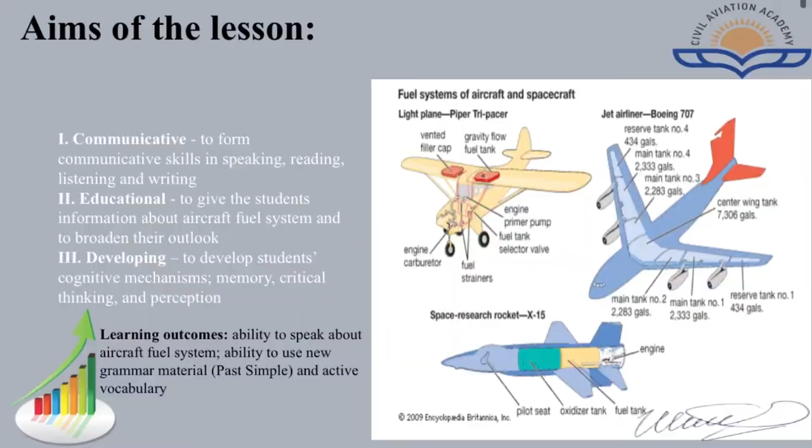While aircraft fuel systems are not regarded as one of the glamorous features of an aircraft's functionality, they are an essential feature of all aircraft. Their implementation and functional characteristics play a critical role in the design, certification and operational aspects of both military and commercial planes. In fact, the impact of fuel system design on an aircraft's operational capabilities encompasses a range of technologies that are much more significant than the non-specialist would at first realize, particularly when considering the complexities of large transport and high-speed military aircraft applications.

An aircraft fuel system may be defined as a system which enables the fuel to be loaded, stored, managed, and delivered to the propulsion system engines of the aircraft.

Fuel systems differ greatly from aircraft to aircraft due to the relative size and complexity of the aircraft in which they are installed. In its most basic form, the fuel system will consist of a single gravity feed fuel tank with the associated fuel lines connecting into the aircraft engine.

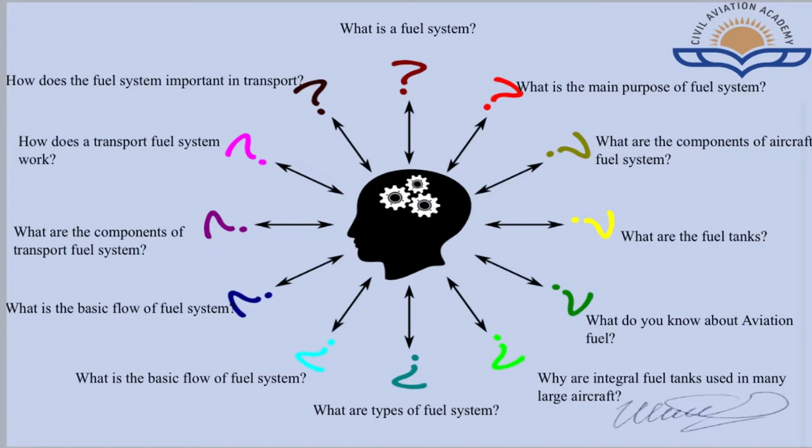Before watching the video about aircraft fuel system, I would like to give a list of words with definitions. The basic units in the fuel system are the fuel tanks. These tanks contain fuel, which is kerosene in the case of gas turbine aircraft and gasoline in the case of piston-powered aircraft. The fuel tanks are an integral part of the wing structure.

Fuel can be gravity fed to the engines or pumped by electrically operated booster pumps. The fuel flow rate of the engines is determined by the setting of the power levers.

The pipes which carry the fuel to the engines are fitted with non-return valves and also have shut-off cocks to cut fuel flow to the engine in the event of fire.

The third and important element in the fuel system is fuel filtration, which uses filters to remove any contamination from the fuel before it enters the engine. The fuel is usually heated as it is being pumped to the engines to improve combustion efficiency.

Fuel loading can be by a pressurized system or by a gravity system. The pressurized system is connected under the wing, while the gravity system is connected over the wing. Fuel quantity is shown by gauges, which can display in pounds, kilograms, gallons, or liters.

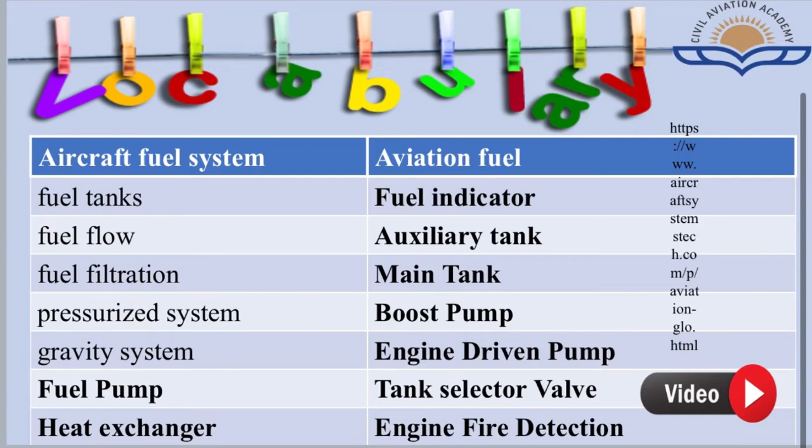Let's watch a video about aircraft fuel system.

In this lesson, we will look at fuel distribution systems. The aircraft fuel system is designed to store and deliver fuel to the engine fuel system. It must be capable of delivering more fuel than the engine can possibly use in its most critical phase of flight, so that the engine is never starved of fuel.

Big jets, such as the Boeing 747, can burn as much as 10,000 kilograms per engine per hour during the takeoff phase.

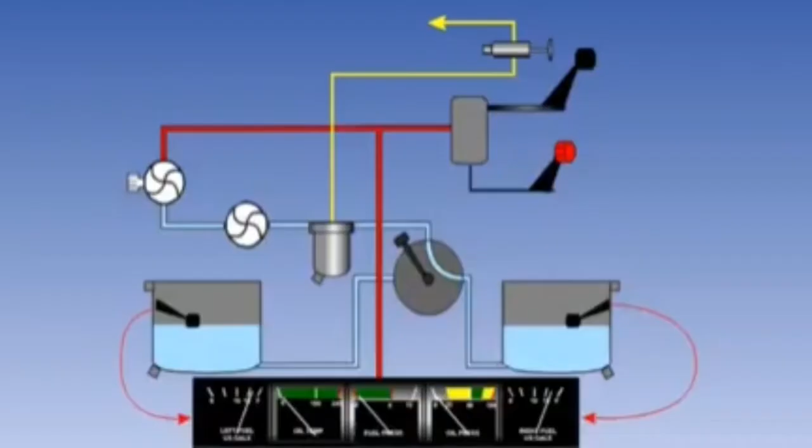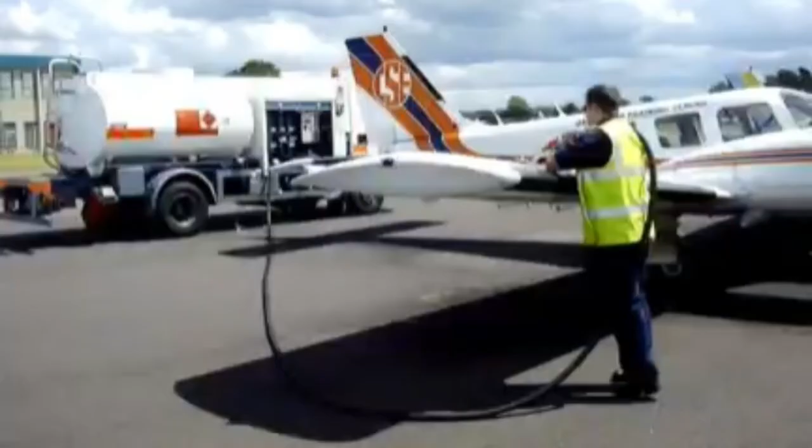Here is a diagram of a simple, single-engined light aircraft fuel system. The fuel tanks are rigid tanks fitted in the wings. They are filled by an open-line refueling pipe through a filler cap on top of the wing.

The fuel is drawn from the tanks by a mechanical or electrical fuel pump, through a hand-operated tank selector, which allows the pilot to use fuel from either the right or left tank, or turn off the supply completely.

The fuel then passes through a strainer, which filters out any foreign objects and debris before being delivered to the engine carburetor.

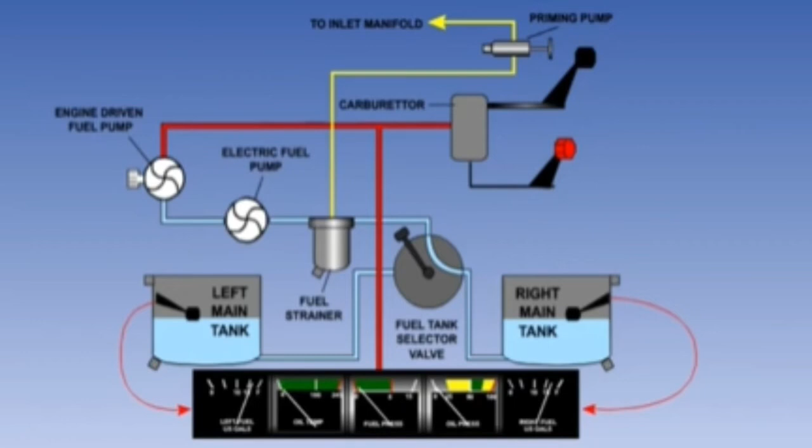Piston engines often need to be primed with fuel prior to engine start. This is achieved by use of a hand-operated priming pump, which takes fuel from the filter housing and delivers it to the engine inlet manifold.

The fuel system is monitored for contents using simple float-operated level sensors, and fuel pump operation is monitored by a fuel pressure gauge. Drain valves allow any water in the fuel to be removed before flight.

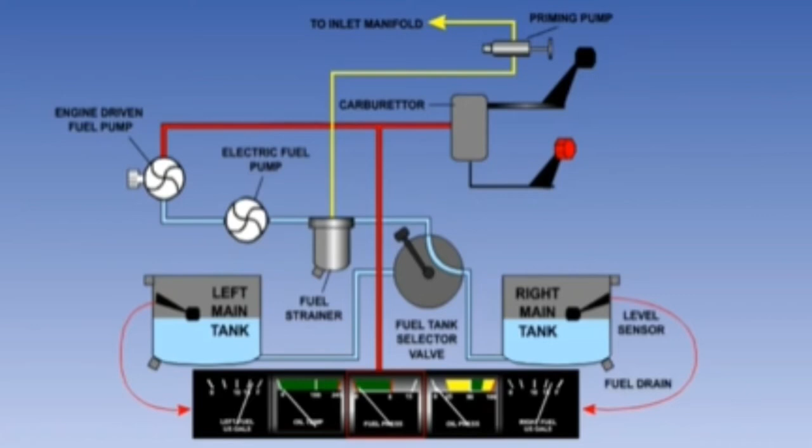Multi-engined gas turbine aircraft have more complex fuel systems to cope with the extra problems brought about by high-altitude operations, the use of multiple fuel tanks, and the need to feed the fuel to more than one engine.

The fuel tanks are usually integral tanks in the wings. Many modern aircraft may also have a center tank, a tank in the center section torsion box between the wings.

Some aircraft types also have fuel tanks in the fin or stabilizer, as well as being used to increase fuel capacity. This fuel may also be used to change the position of the aircraft's center of gravity.

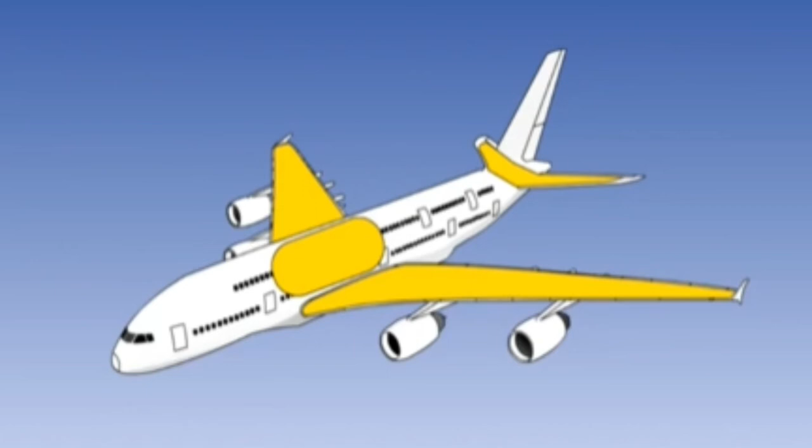There are a number of components and subsystems common to all multi-engined aircraft fuel systems. We will now look at these in some detail.

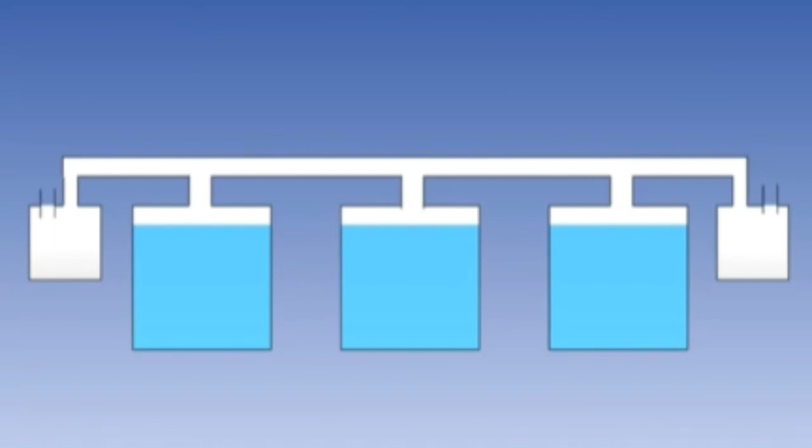The fuel tanks are fitted with a vent system. The purpose of the vent system is to allow the air pressure above the fuel in the tank to equalize with the ambient pressure.

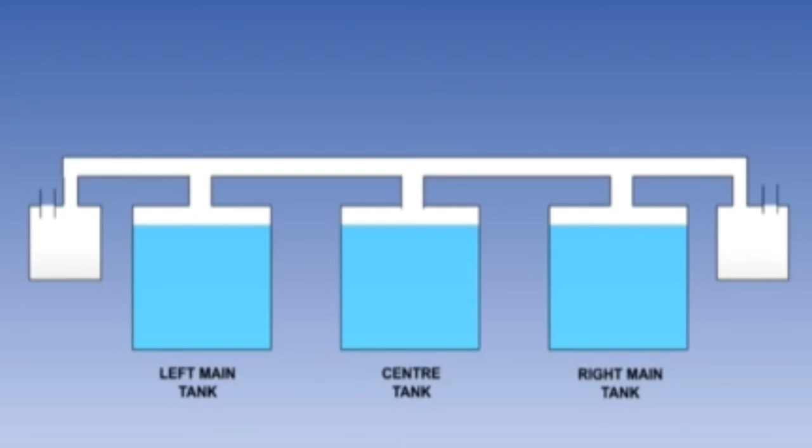The areas above the fuel in each tank are connected together by a vent pipe. The ends of the vent pipe terminate in small vent surge tanks located at each wingtip.

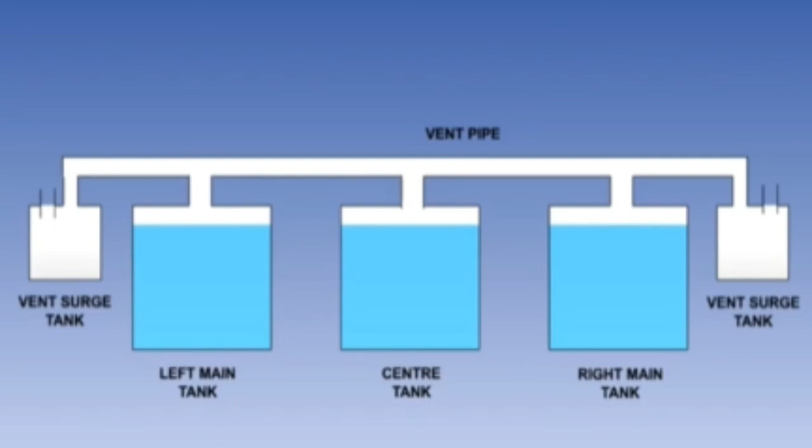The vent surge tanks are vented to the atmosphere. They are there to collect any liquid fuel which might get into the vent system during unusual maneuvering or because of overfilling of the fuel tanks.

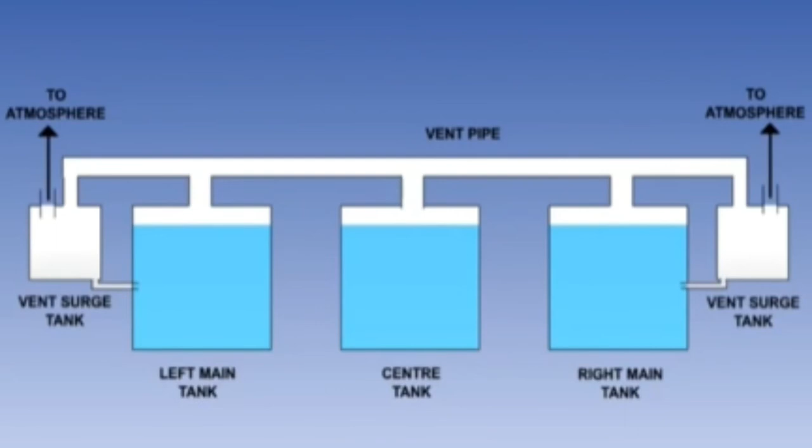Any fuel caught in the vent surge tanks is returned to the main tanks either by gravity or by the operation of a pump.

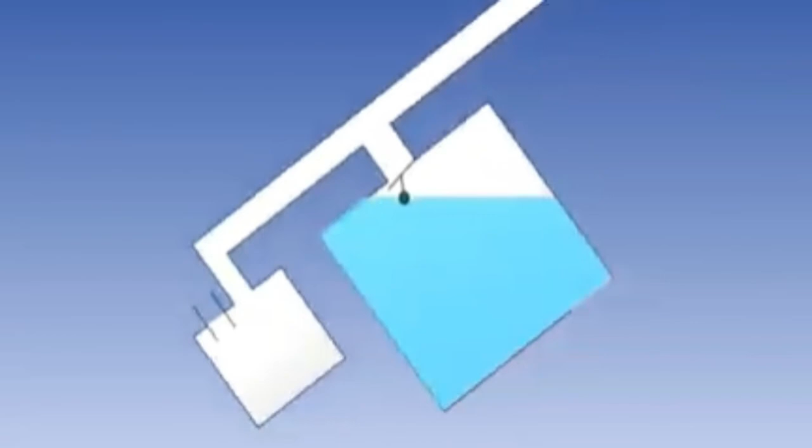Some systems have float-operated vent valves fitted, which close to prevent liquid fuel entering the vent system.

The EASA regulations require that when a fuel tank is full, a minimum of 2% by volume of the tank capacity is free of fuel to allow the vent system to operate correctly.

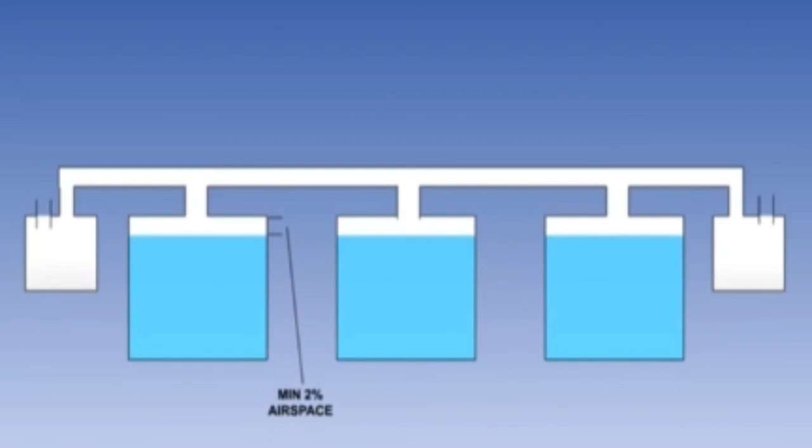If during refueling the fuel reaches this level, then the high-level float switch or volumetric top-off unit will close the refueling valve.

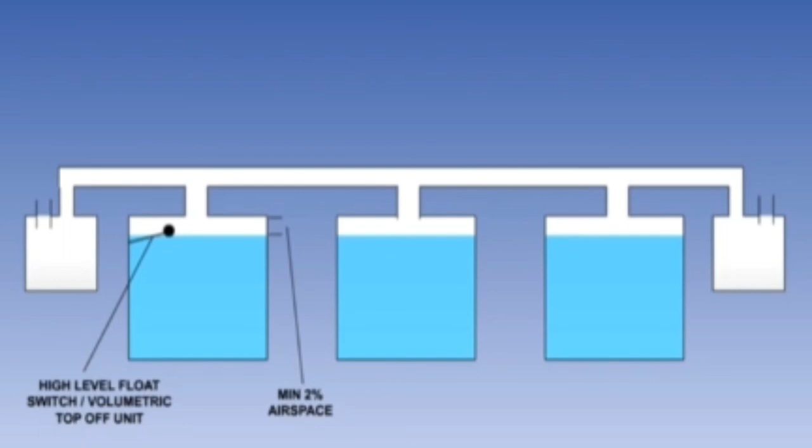As the aircraft climbs, the air pressure reduces.